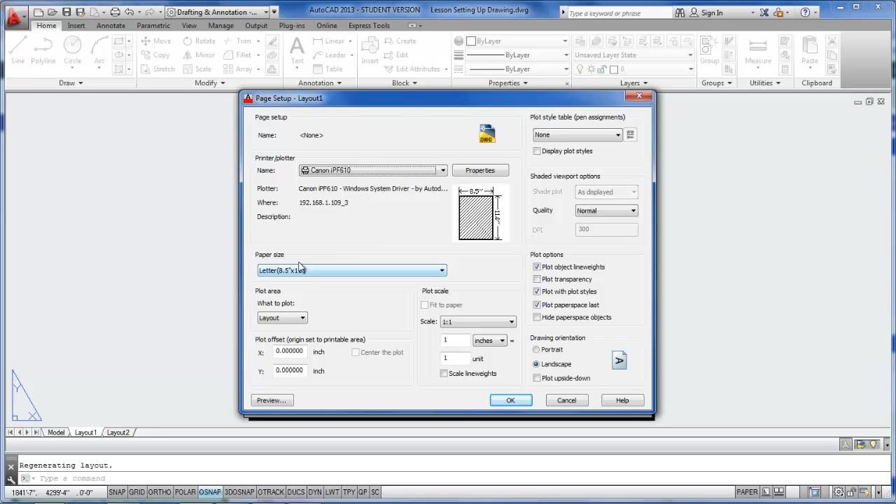First thing we're going to do is pull up a printer or plotter, and you'll have to ask your lab or wherever you're working where the best plotter to pick would be. I'm going to pick my Canon IPF 610 since it does have a letter size, which is shown right here under paper size. The next thing I want to do is click on the Layout tab, and I want to pick Window.

From there, I want to click just inside this dashed line. What this dashed line going around the drawing is, that's the margin of your paper. So that is outside the printable margin, anything between there and the edge of the paper. So we want to select inside that margin to begin with, and then come down to here.

We'll say, also want to pick monochrome, so you can just start out with the monochrome. That makes sure that everything will print in black and white. Plot scale, we want to make sure that keeps at 1:1.

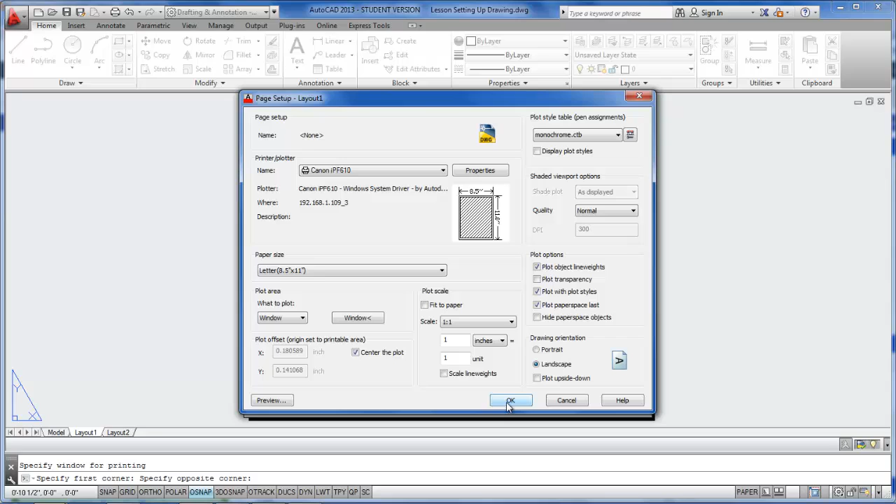Offset, a lot of times I will click the center of the plot. And then under options, I'm not really going to be too concerned with those at this time. Print quality, normal, and landscape - we can always change those in the print preview window. So let's say OK, and then we'll close.

So now we have our page set up for 8.5 by 11. When we click this solid rectangle in the middle is your viewport. You know it's a viewport because there are no midpoint grips, and you can grab one of the corner grips and move this, and it will keep everything parallel and square or in a rectangle.

So I'm going to move this around just a little bit and make room for a title block. Hit escape to get rid of the grips. Now I'm going to start the rectangle command just by typing it into the keyboard. And I'm going to click down. My O-snaps are on, so it's locking onto that viewport, which is fine.

I'm going to click there, and since we're on an 8.5 by 11 sheet of paper, I'm going to give it a command that says 'at', so we're using a relative coordinate system. So from that point, we're going to go 1.5 inches in the X direction, and then 8 inches in the vertical or the Y direction.

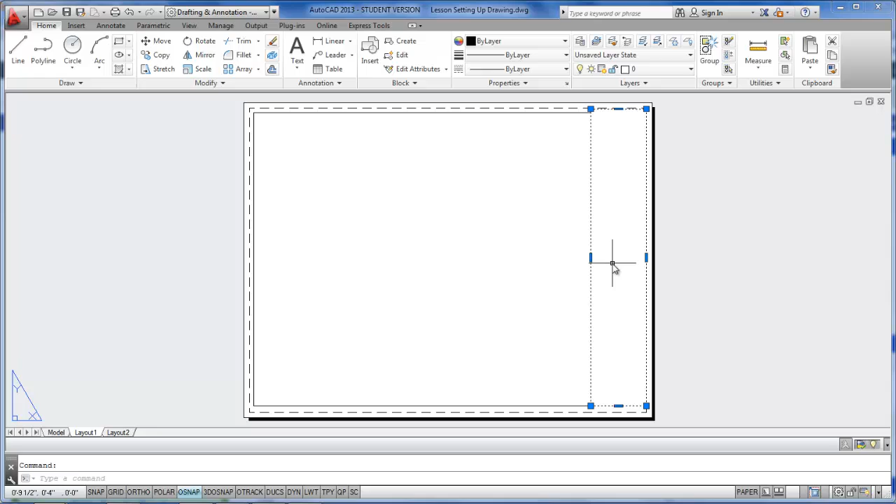So we will type in 1.5. Everything defaults to inches unless you specify feet. We're going to do the comma, and then we'll say 8 and enter. And that just filled up this space with a 1.5 inch by 8 inch rectangle for a title block. It's a little off center, which is fine. We can adjust that in a little bit.

Next thing I want to do is set up text. So to set up text, let's go up and click on the Annotate tab. And I already have some text set up, so I'll just kind of go over how we did that. You can click on the little arrow going down and to the right. That'll bring up this dialog box.

If you don't have these already set, like I have title block, let's change that. We need to add a new one called paper space. So I already added a model space. So in model space, I've selected a font. It's regular instead of being bold or italic. We're going to select regular.

Annotative, when you're just learning, I really want you to turn annotative off. And then for a height, 2 feet, not upside down, not backwards, with a width factor of 1. So I can go ahead and say set that one current just for fun. Then I'm going to click on the new tab, new button, and I'm going to call it paper space.

And select OK. Then for paper space, I'm going to keep the same font, regular. The only thing I'm going to change is I'm going to go in here and put in 1/8 inch.

Now 1/8 inch is a different default than we have set up for our tolerances. Our tolerances are at 1/2 inch. So when I hit enter, 1/8 inch is going to disappear and show 0 feet 0 inches, but it will take the 1/8 inch height.

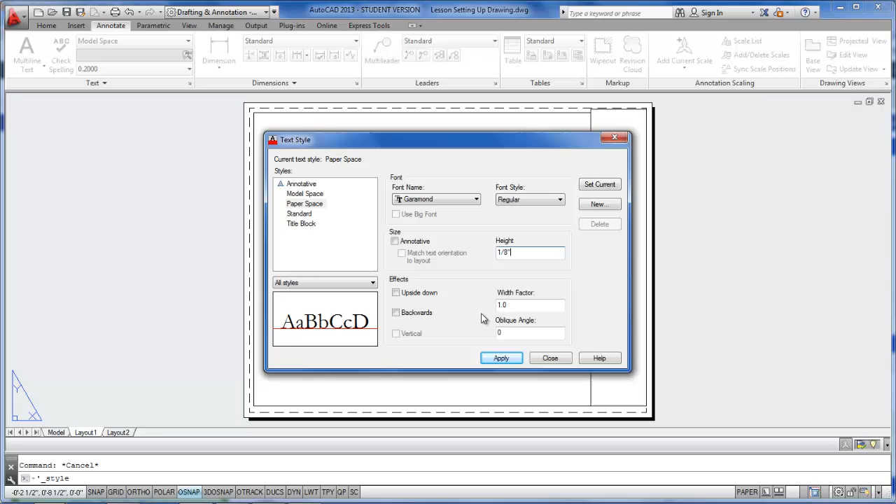And there it goes. So I'm going to go ahead and close out of this and start text. Up here I like to use single line text, so I clicked on that. I'm going to start up at the top, and here we want your company name, in this case your student name.

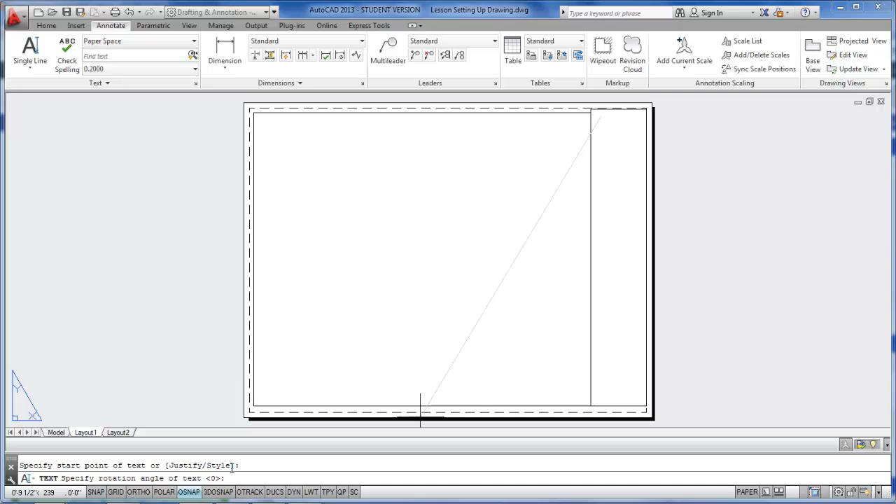If we go down and read the command line, we're asked to specify a rotation angle of text. 0 is the default, 0 is fine. I'm going to press enter. Now that's going to disappear, and it's going to ask for the text. So I'm going to put in the default, just say my company.

And then I'll maybe say student name. You'll notice in single line text, it is letting me continue to type in lines of text automatically spaced. And a phone number, so 303-XXX to be filled in later. When I press enter, it's going to return for one more line of text.

I'm done entering text, so when I press enter another time, it'll get me out of the command and my text will be there. But if you go back and click on this, you can double click quickly and it's fully editable, so you can edit this at any time. Now I'm going to hit escape.

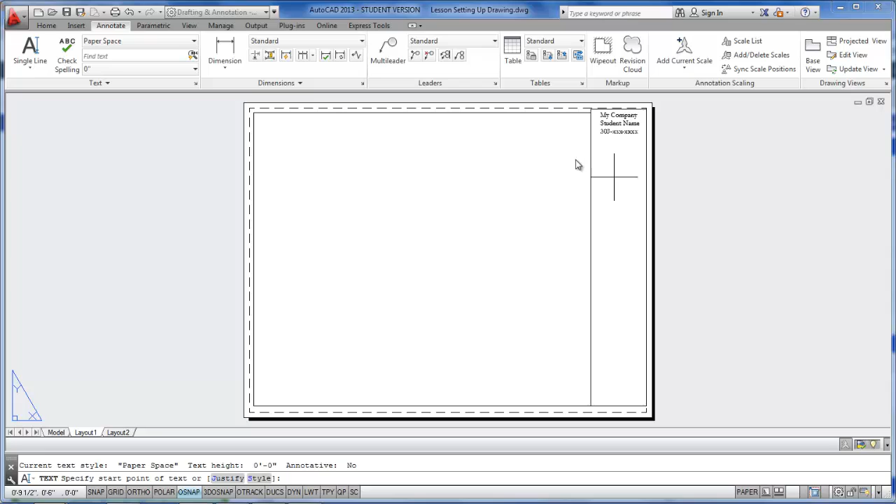I'm going to do text one more time, so I'm going to go up here. Now that I have single line text as the default, all I have to do is click on the A and it started my text. It's asked me for a justify or style. I am happy. And notice that this is in paper space.

So I set up that paper space so my text height is 1/8 of an inch automatically. Now I'm going to click where I want my text to start. It's asked me for a rotation angle. This time I want it to go vertical, so I'm going to put in 90 degrees.

Now you'll notice that the carriage return is still going horizontal, and that's just so you can read it. Once you hit enter, it's going to flip that 90 degrees.

So I'm going to say my client's name, address, city, and state, all just placeholders that I can edit at any time. So I press enter, it's going to look for one more line of text. I'm done, I'm going to press enter again and it automatically rotates.

And now for the bottom part of my title block, I'm going to do the copy command. I'm going to come up here and grab these 3 lines of text. I'm going to bring them down to the bottom. I'm going to turn my ortho on, F8, click down here.

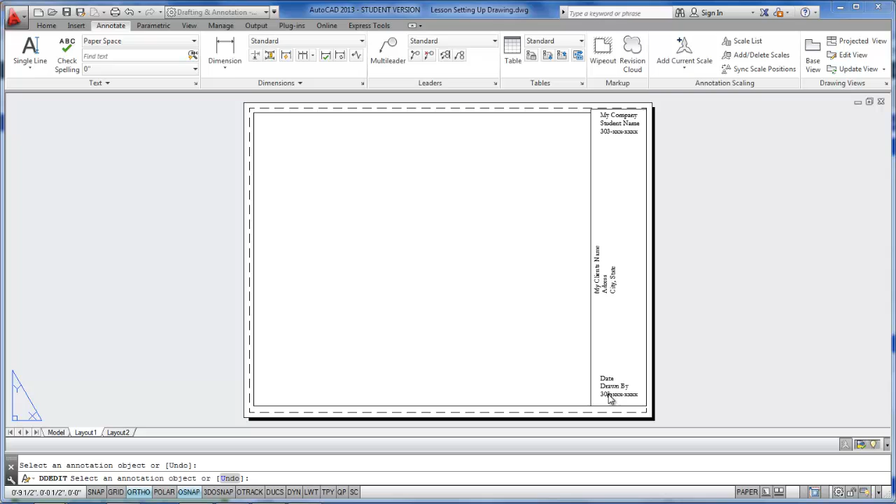Down here, typically, we're going to say we need a date. We need a drawn by. And I also put my written scale. So scale in that bottom part. I click anywhere on the screen. I'm all done editing. I'm going to hit escape again to exit out of there.

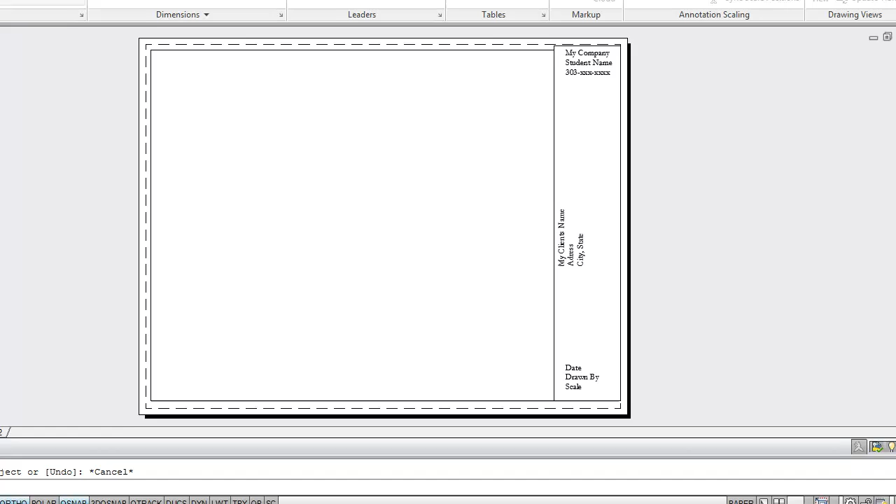So that is how I set up my basic drawing. I'm going to come up here to the A. I'm going to say save as, and I'm going to call this my base drawing. Once I save this, nothing else will ever have to happen with this drawing. I can, as long as I don't overwrite this drawing, call it base 13 for release 13, and I'm going to save it.

So whenever you open up a new drawing, start a new project, open up this drawing and rename it immediately to what the project is you're working on.